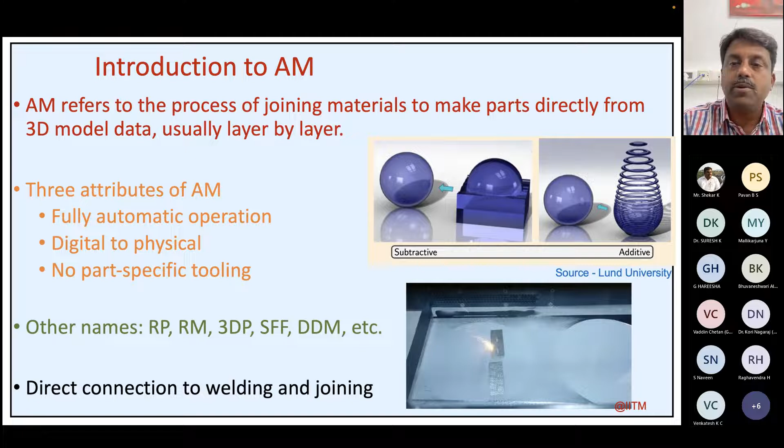So regarding the timeline, when does all this happen? If you look at additive manufacturing as such, it is not so new. The first patent of realizing a component in a welding-based process, where one person used a welding torch, a gas metal arc torch, and started depositing layer by layer to produce a final part, was actually filed in 1924 - even before our independence, before the Second World War. As welding scientists and professionals call it, this is a multi-pass weld, or weld overlay, and weld overlay was actually used to fabricate near-net-shape components for a long time.

But then the actual technique of producing the final component layer by layer, in a new era, was patented by a Japanese scientist named Hideo Kodama. Hideo Kodama first realized the fabrication of a component using photopolymers. These photopolymers are nothing but like the paint we apply for wall painting - when exposed to sunlight, the liquid paint cures and becomes solid.

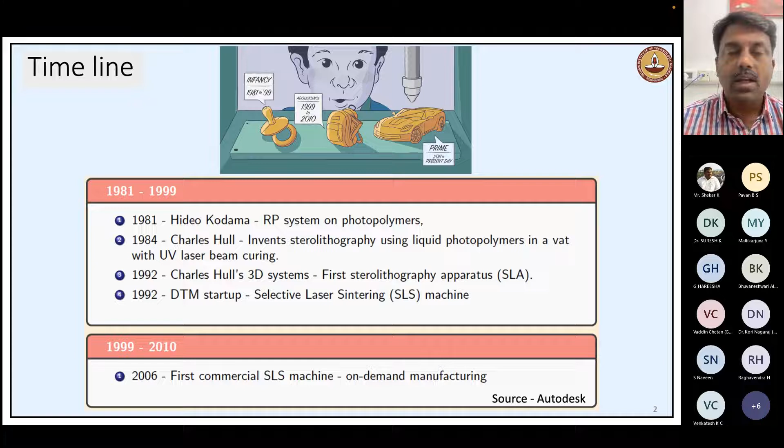So if you look at the history between the 90s and right now, simultaneously other techniques like laser wire or welding-based setups also came up to produce large volume components, which I will discuss in subsequent slides. So what is the state of the art now in additive manufacturing?

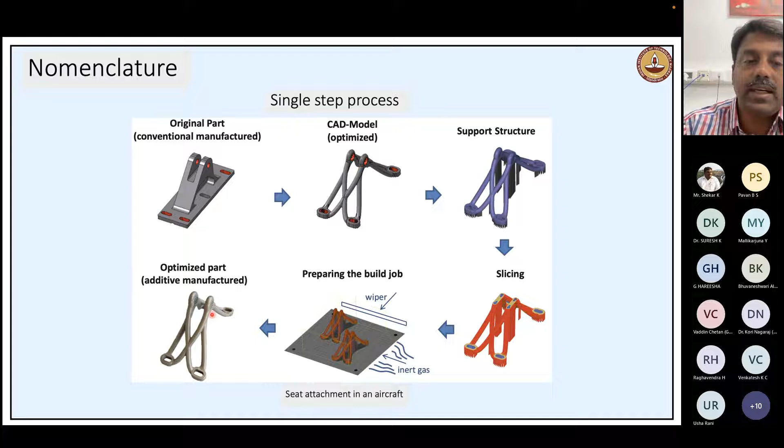For making such a part, you can't use a casting process - it becomes very brittle, and it's difficult to produce thin sections. So the only best way is to just print it. We redesign the part because of the design freedom we have in additive manufacturing, developing a complex design, converting it to CAD drawing, doing slicing and path planning, and printing it to realize the final part, which can be used straight away in the end use. This is a single step process.

Some processes require multiple steps in additive manufacturing. For example, if you want to produce a ceramic component - ceramics, when we actually want to print, you can't melt a ceramic particle.

For example, if you want to produce an aluminum oxide component, or silicon carbide, or tungsten carbide. So what we do is we start with CAD data, and then use a technique like binder jetting, where we mix the powder with binder selectively at the location where we want to create a solid object.

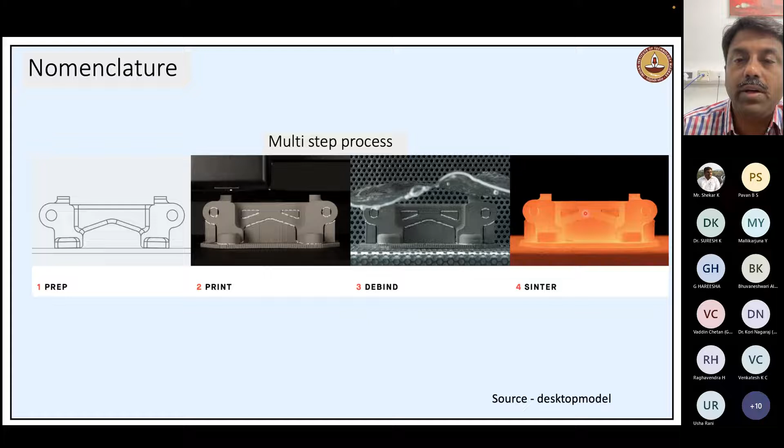Subsequently the powder mixed with binder is heated up to debind and then sinter the part so that we create a dense component. This requires multiple steps: printing, then post-processing to debind, then sinter the part. So in additive manufacturing, you can do single-step or multi-step component fabrication, based on the feedstock we use or the properties we want to achieve. So what are the benefits of additive manufacturing?

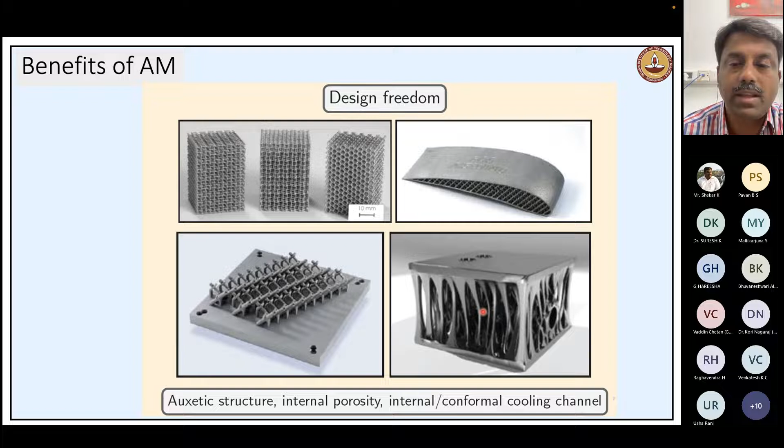If the tool is cooled and the temperature of the tool is maintained, we expect the tool life to increase significantly, and the performance of the component as well when it is exposed to high temperatures. There are other complex designs we can use for various engineering applications, including conformal cooling channels. All these things are possible only by additive manufacturing.

In conventional manufacturing, what you see is what you get. Whereas here, what you see is what you print. So you can visualize and make a CAD drawing, and then you can realize that part, in an extremely cost and time effective manner, and the process is fully automated because the entire process chain can be controlled, with unattended operations and no part-specific tooling.

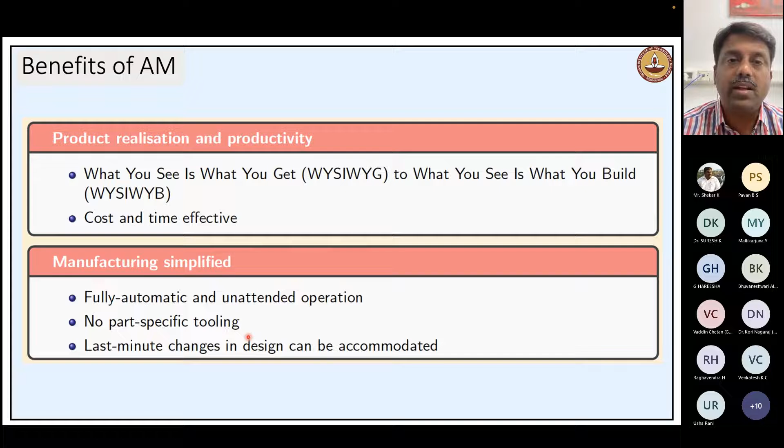If anyone wants to change the design last minute in conventional manufacturing, it is not possible. We'll have to go back and change the entire process chain, including the equipment, tools, and everything, to change even a small design. Whereas here, if some design change needs to be accommodated, we can quickly do that as well.

We can introduce effective design, as I talked about, and we can also introduce new materials. The material selection for any engineering or biomedical application is strongly dependent on the manufacturing method. For example, for casting aluminum alloys, we always prefer aluminum silicon alloy because it is castable. If you use any other aluminum alloy, it may crack during the casting process. So the selection of material is strongly dependent on the manufacturing method.

Some other alloys, for example aluminum 7000 alloys, can have excellent mechanical properties, but you cannot use them when producing by casting. So how do we make use of those alloys? We can use additive manufacturing. The alloys which show excellent performance at laboratory scale, the new alloys we develop, if they are not machinable and not castable, we cannot use them for engineering applications. But because of additive manufacturing, we can also use those alloys that show excellent performance.

For example, one of the implants I showed you, we are developing a new alloy based on cobalt-chrome composition. Cobalt is toxic, but cobalt-chrome implants we produce for dental and maxillofacial applications show excellent properties if the cobalt concentration is reduced to less than 30%, compared to about 60% in conventional cobalt-chrome. Reducing cobalt concentration is good because cobalt is toxic when used in implants, and cobalt ions released when the implant is in body fluid conditions are very toxic for the body.

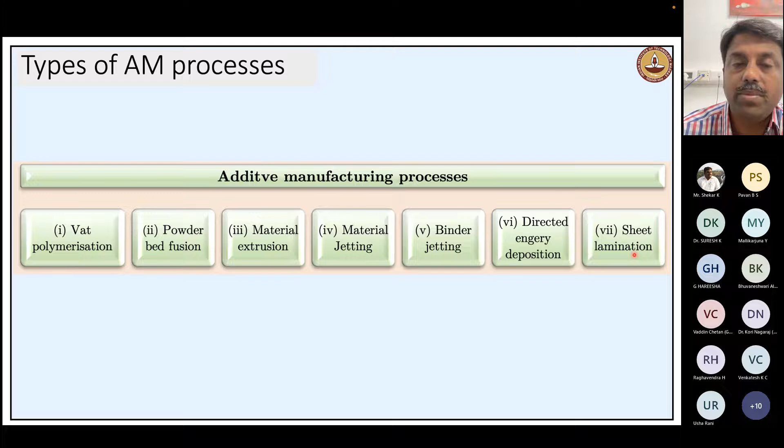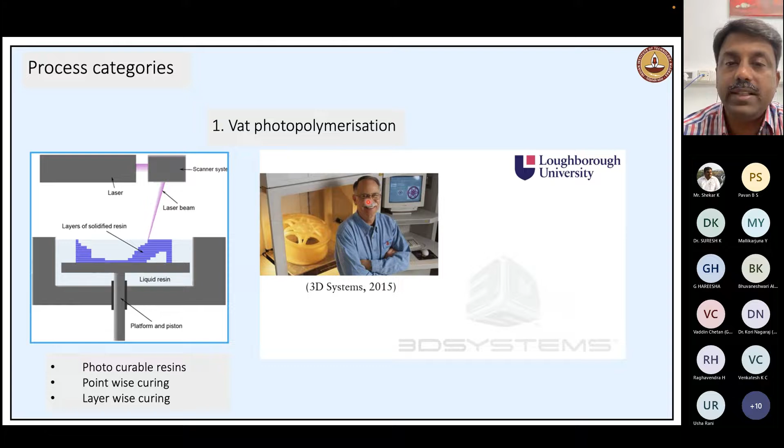So what is the first process? The stereolithography apparatus, the first process commercially developed by Charles Hull. In this case, we take a photopolymer. What is a photopolymer? This photopolymer cures when it receives light photons. So we take the photopolymer in a container, which a vat is, right?

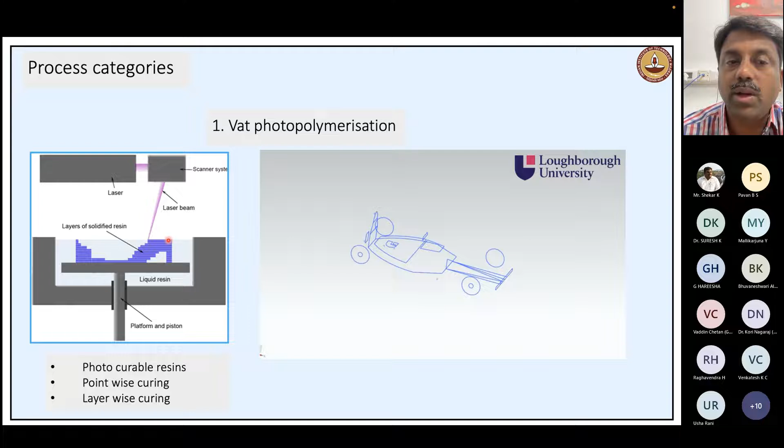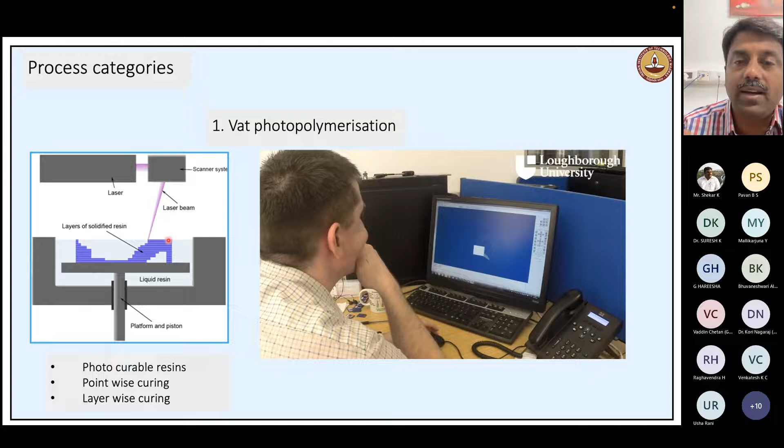And then we selectively expose only at the locations where we want to create a solid, by photopolymerization reaction. These photopolymers can be acrylics, epoxies, or vinyl ethers. You see advertisements for paint, right? Epoxy paints or acrylic paints and so on. We use those as feedstock, and then we use a light source, either laser or ultraviolet.

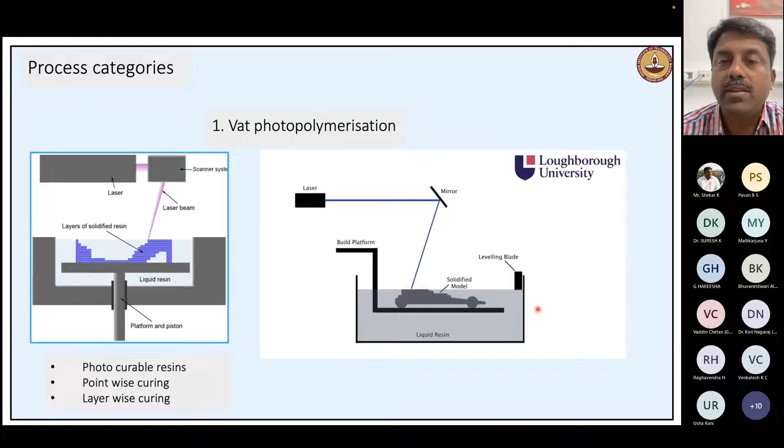What you see over here is a build platform, and the photopolymer liquid is filled, and in the liquid state it's a monomer. So when the light falls onto this, the monomer becomes polymer by cross-linking. So now the laser actually scans, and we selectively cure the photopolymer at the locations where the light falls.

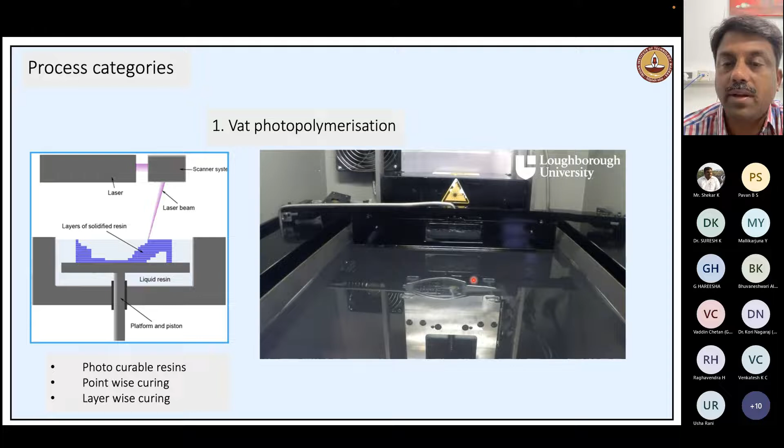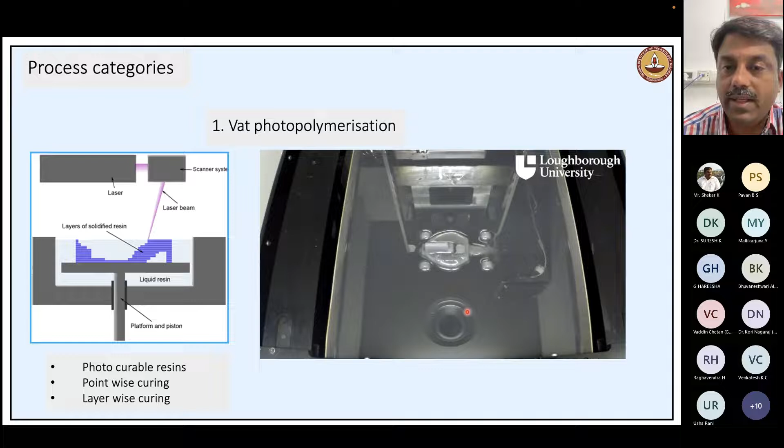So once one layer is done, we get the second layer by spreading new liquid photopolymer on top of it, and this process is repeated. Finally we get the object made. This technique is known as vat photopolymerization because the photopolymer is kept in a vat, and cured by selectively exposing it to light photons. That's why we call it stereolithography apparatus by the commercial term, but the actual academic term is vat photopolymerization.

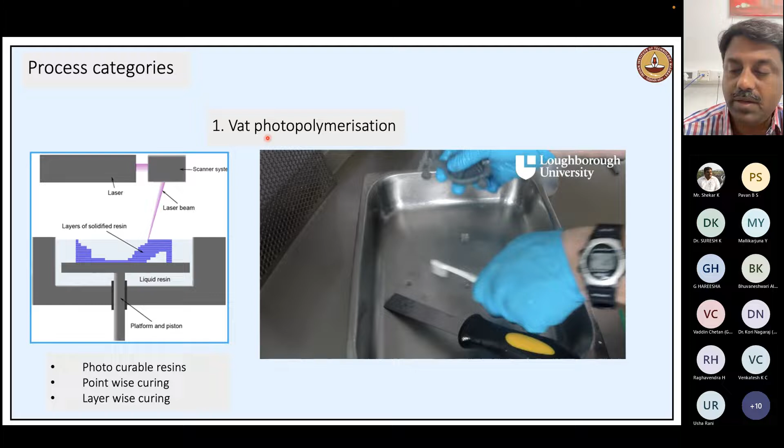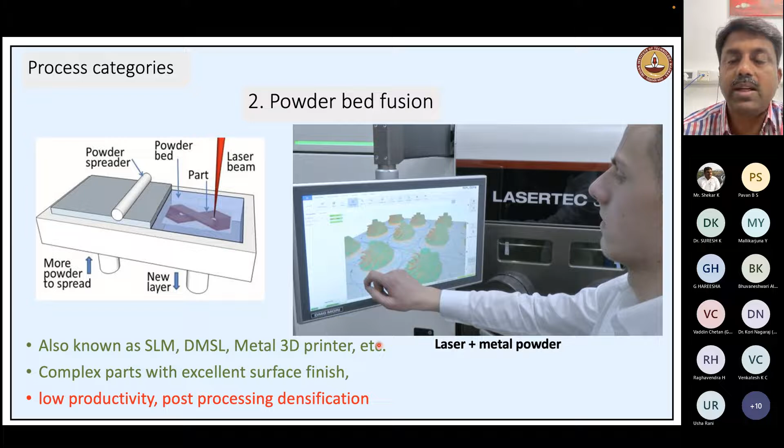The second technique is powder bed fusion, and you must be hearing this technique called metal 3D printer, or various names like SLM, DMLS—these are commercial trademark names, but the actual name is powder bed fusion. In this case, feedstock powder is kept on the substrate, and the laser or electron beam selectively melts the powder, only where the laser is exposed, melting it to create a molten pool, which solidifies based on the layer geometry we are creating.

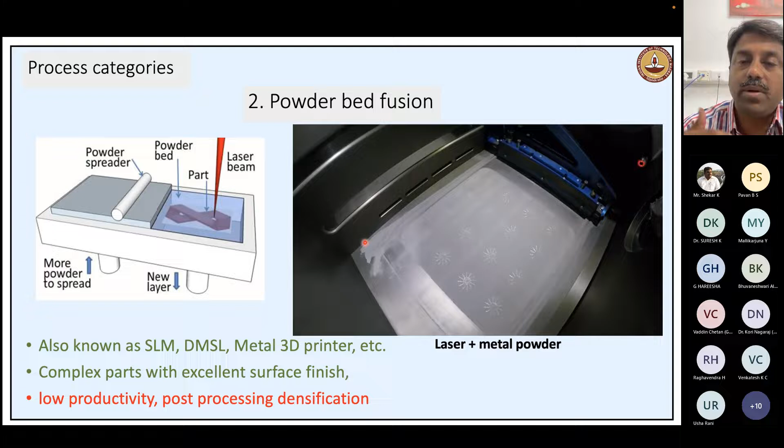So we first take the powder and spread it onto a substrate, and once the powder is spread, the laser falls onto it, and then subsequently melts the powder layer by layer. We create a weld made at a very fine and localized condition, about 40 to 80 microns per layer, welded with the previous layer. This process continues, and once we finish printing all the layers, we take the final object out and use it for various applications.

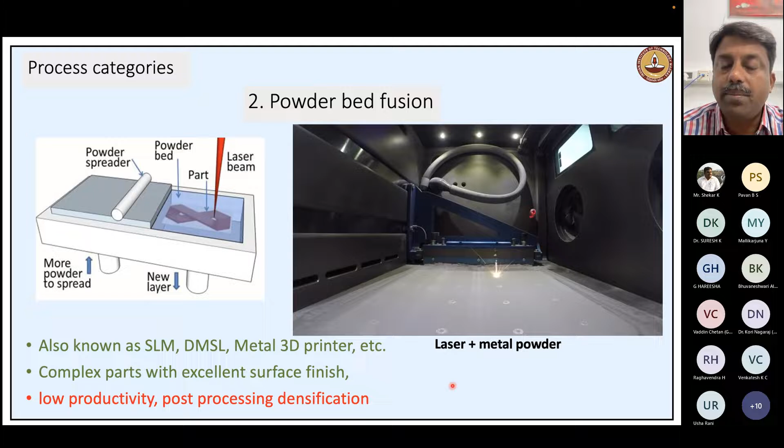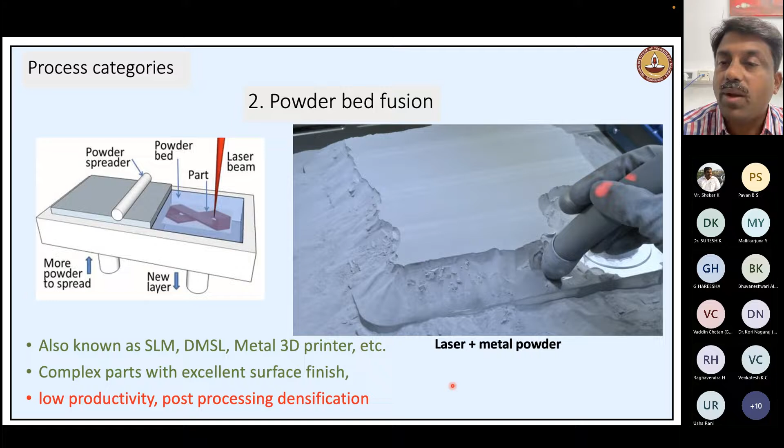So what is the advantage of this process? You get excellent surface finish compared to other metal additive manufacturing processes. Most cases, we use this for features less than a millimeter. For complex shape containing components in metals and alloys, we use this process. We can use a large amount of engineering alloys, as long as the thumb rule is satisfied: the alloy must be weldable.

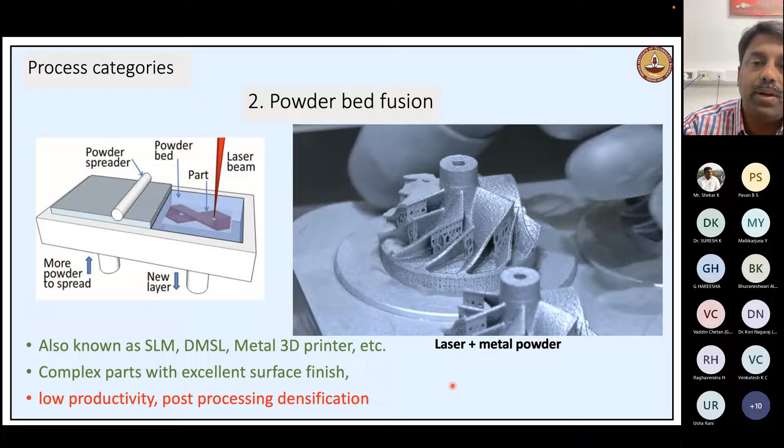A disadvantage of this process is low productivity, because we have to spread the powder and then the laser melts it, so compared to other processes it is slightly slow. And when the laser power is low and we only sinter rather than melt, we need post-processing, which makes it a multi-step process.

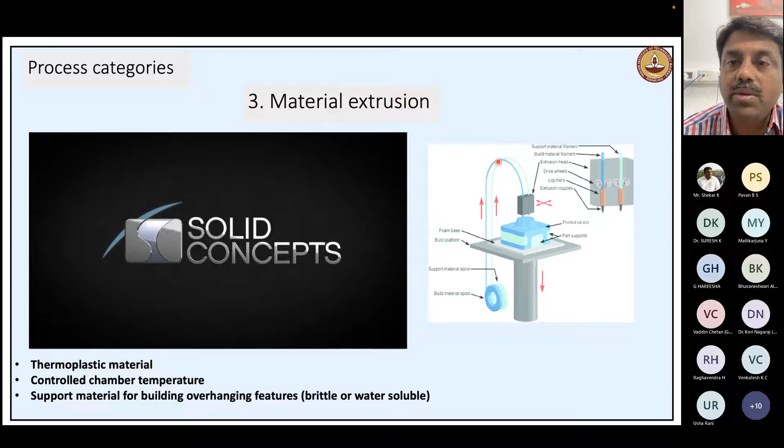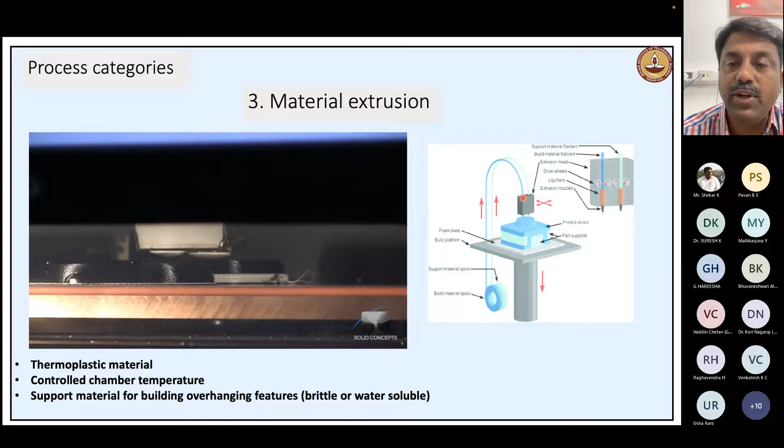Good. So the third additive manufacturing technique is known as material extrusion. In this process, we use a filament, and the filament feedstock is extruded through a heated nozzle. This nozzle at high temperature makes the filament fluidic. So when we take thermoplastics, for example a thermoplastic filament, it's heated up and becomes highly malleable. The heated thermoplastic is deposited through an extrusion nozzle, and the extruded malleable thermoplastic cures either naturally or through activated curing.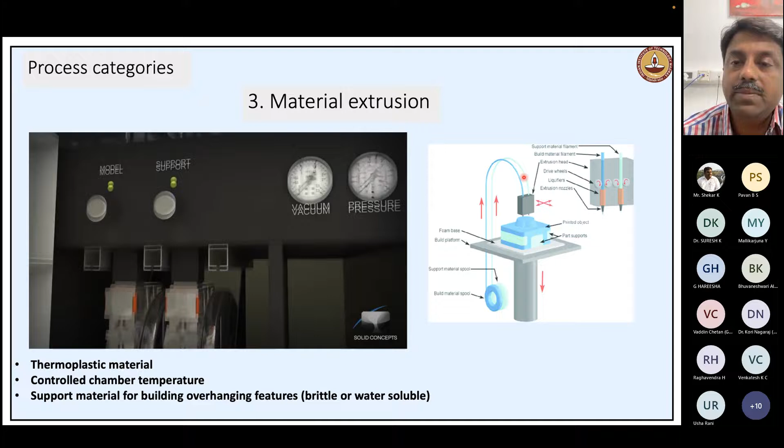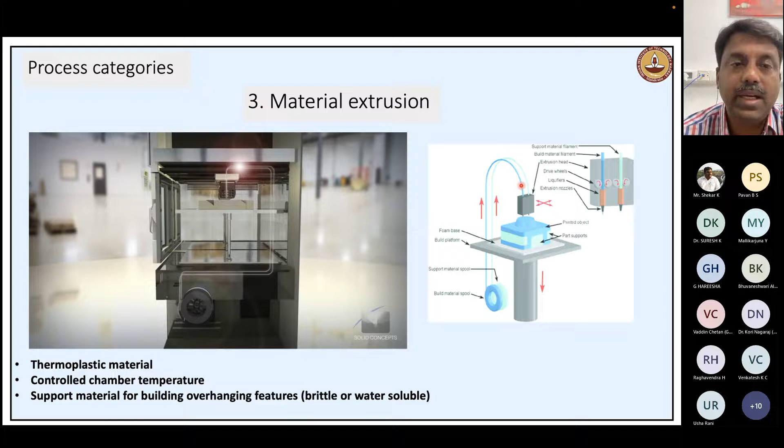And this process, because we are extruding the feedstock, is known as material extrusion. This process is very famous because it is cheap, and you can also build your own setup. Most of the 3D printing equipment you buy online is material extrusion based. We can also use multiple feedstocks—if you have multiple extrusion heads, one can be used for support material, and another for the feedstock material used to create the component.

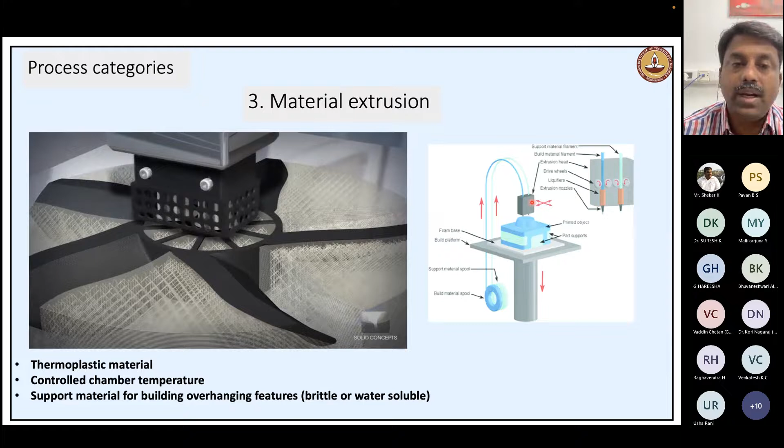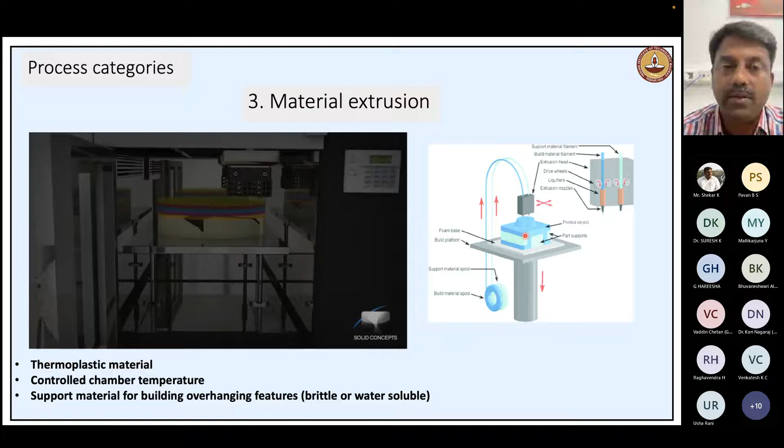The surface finish of this component is determined by the layer thickness and the bead geometry, bead dimensions, which we create, and that can be controlled. We can also use different feedstock, so we can produce, for example, color components by using dyes mixed with the feedstock, and then we can remove the substrate, because the substrate either can be water dissolvable, or you can just remove it to get the final component.

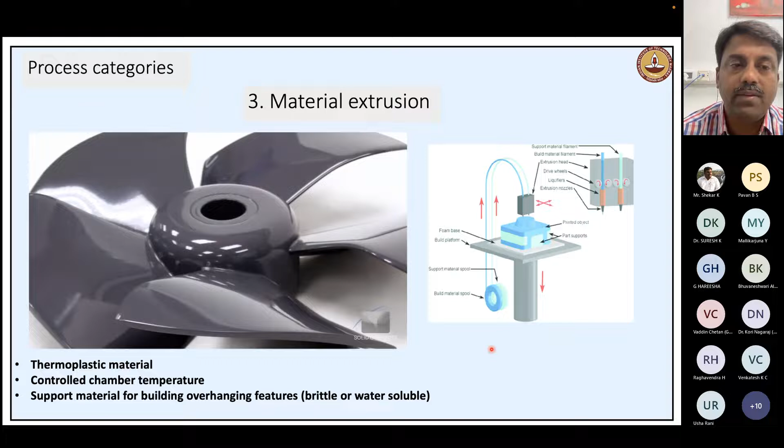Commercially this process is known by various names. For example, FDM, fused deposition modeling, which is actually nothing but material extrusion. FDM is a trademark of a company.

So the fourth process is material jetting. In material jetting, as compared to material extrusion, we use a liquid feedstock, and this process is synonymous to an inkjet printer, what we have for printing.

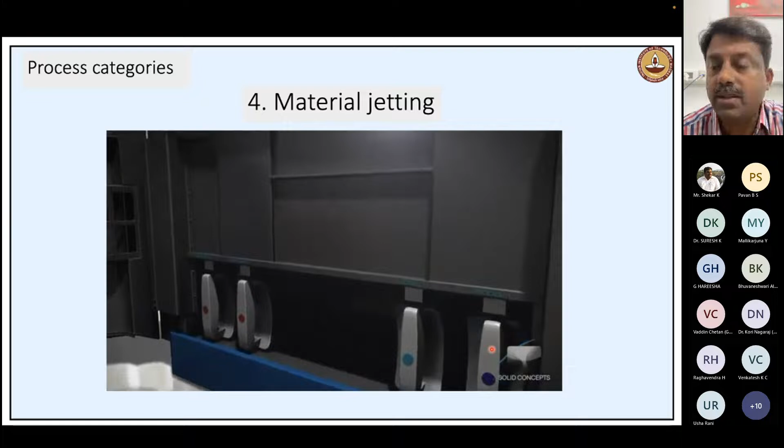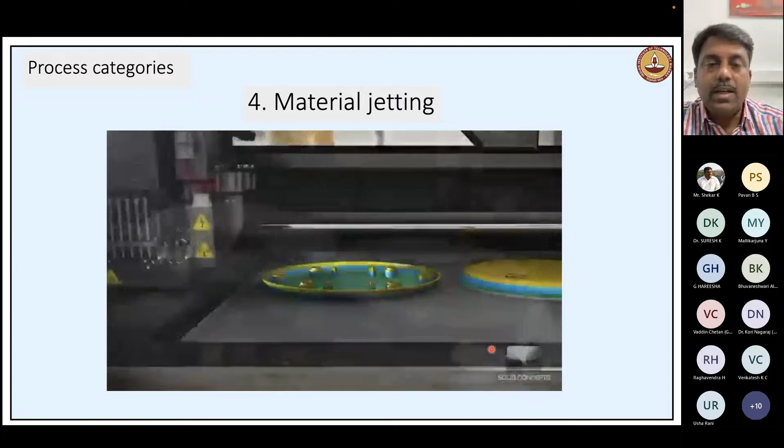For documents, you take ink, and the ink is dispersed using a jet nozzle on a paper at the selected locations where we want to create the color, the black, or you can also use RGB cartridges. Similarly here, we take a liquid feedstock, and this liquid feedstock is selectively deposited on a substrate. The liquid feedstock can cure either naturally, at room temperature and ambient conditions, or we can also photopolymerize it. We can let an ultraviolet ray, or some small heating element, move on top of the deposited liquid onto the substrate, and then the liquid cures, and you get the final object.

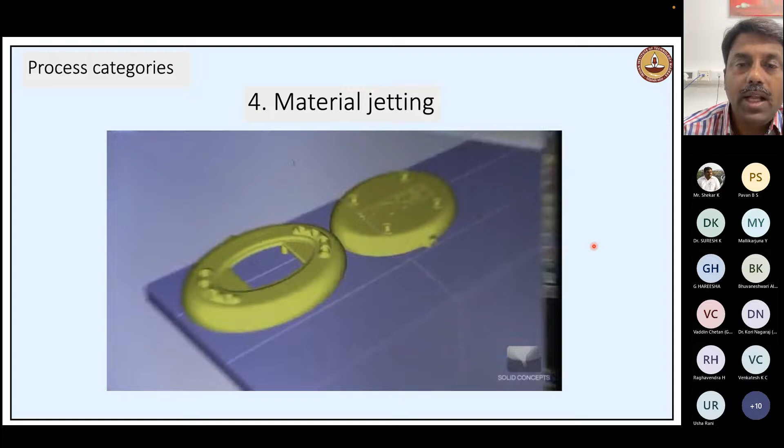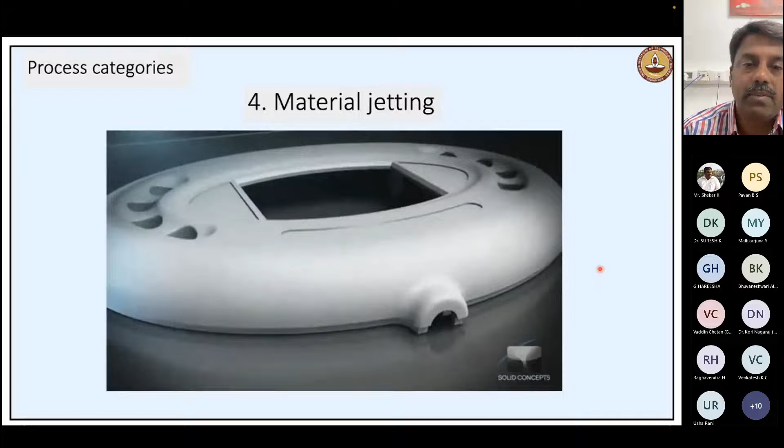The best use for this technique is to create wax molds for investment casting, or we can also produce multicolor components, because the feedstock is a liquid. We can add coloring agents to create objects containing multiple colors. So material jetting, we use it even for our research purposes, to generate multicolor components.

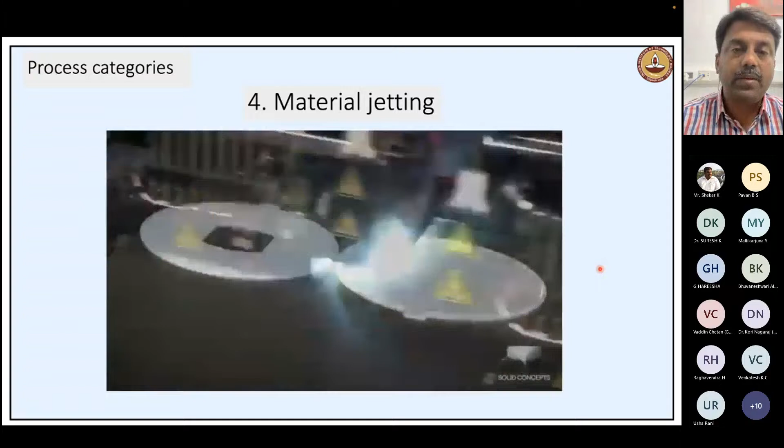We can have multiple composition and gradation, and we can also change the polymer chemistry or even material chemistry. People also use material jetting for metals as well. For example, printed circuit boards, PCBs. People use material jetting to print the entire PCB at one go, including the electronic components and the connections, the backbone, using this technique.

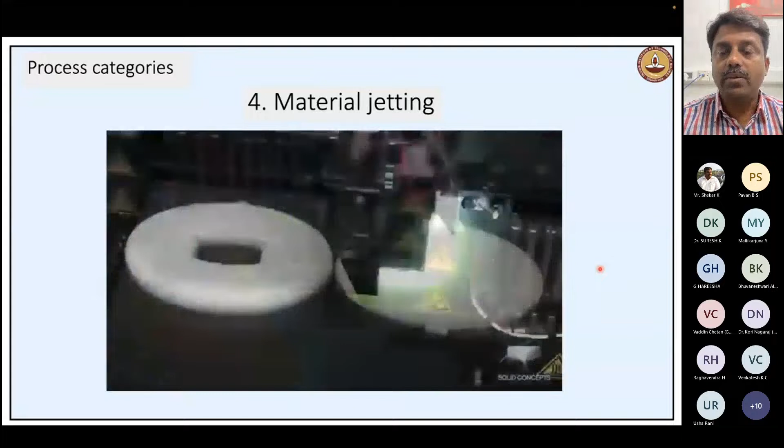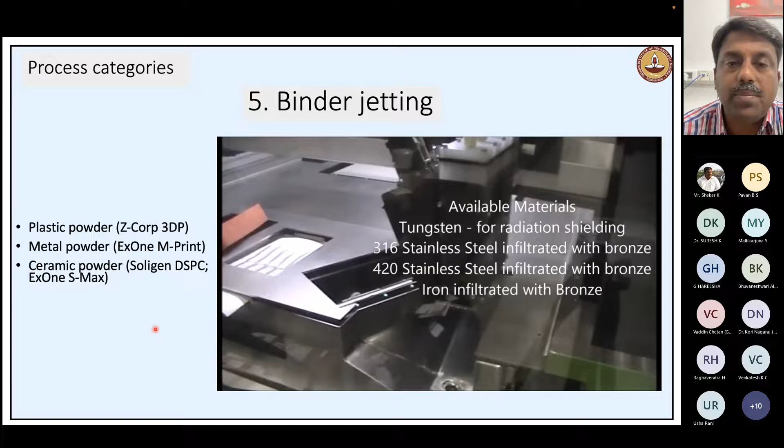The fifth technique available is binder jetting. In binder jetting, it is similar to powder bed, but here the powder is not molten or sintered by a heat source. So we selectively eject the binding agent onto a location where we want to create a consolidation. Binders are added only at the locations where we want to create a consolidation.

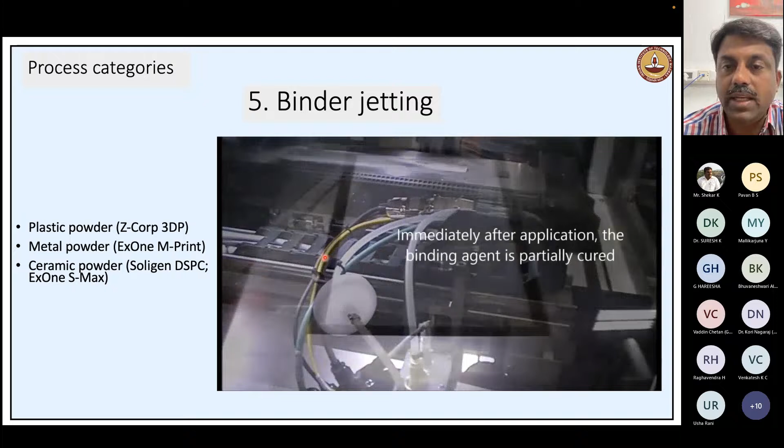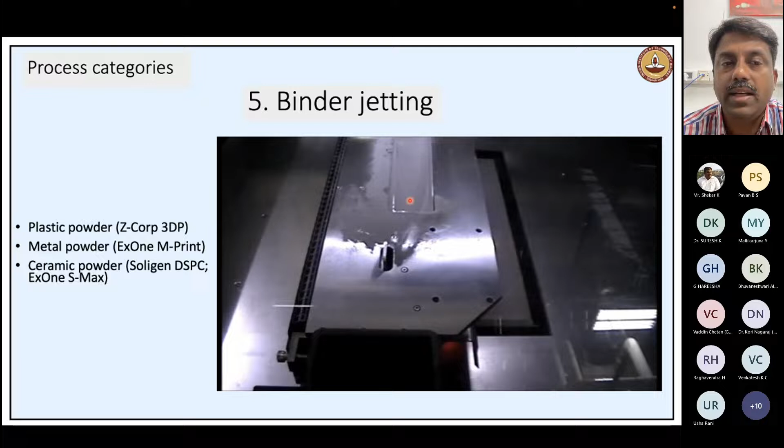So now the binder is added, and then subsequently we can let a small heater heat up the locations where the binder is added, and the binder reacts with the powder, and the powder gets consolidated to create a solid object. Here we are not melting the powder, but a binder is added, creating an agglomeration at the locations where binder is present.

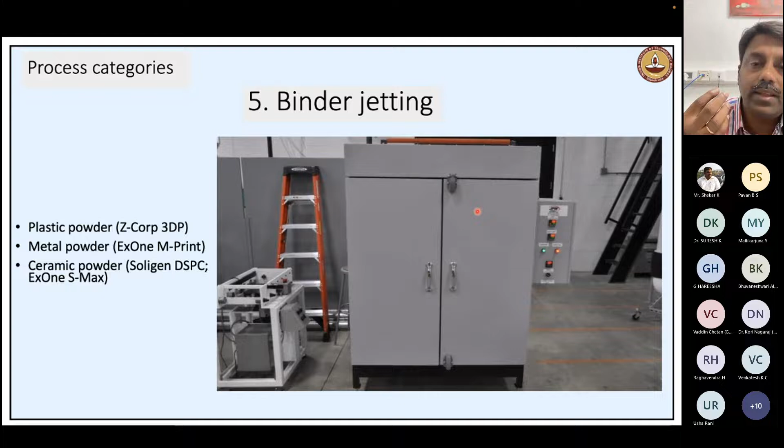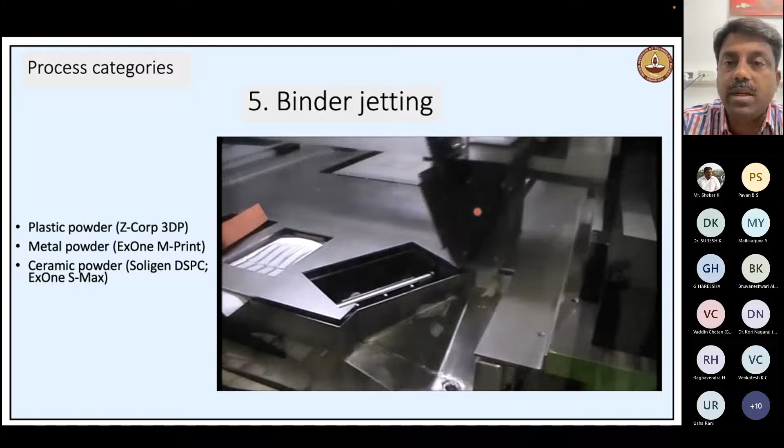Then subsequently the next layer of powder is added, and what we create is actually called the green part. Subsequently we can take the green part out, place it in an oven, and further sinter it to get a final component. So we can also create ceramic components here, hard materials, because we are not melting anything. For the tungsten carbide cobalt ceramic tool, we can effectively produce it by creating a feedstock mixture of tungsten carbide and cobalt, then add binders, and subsequently do a post-process sintering, to get a nice ceramic tool.

The sixth process in additive manufacturing is sheet lamination. Sheet lamination is not quite like another process, because here we use both layer-by-layer manufacturing and machining in combination. The feedstock is a thin foil, and this thin foil is welded with the substrate and previously produced layers by solid state welding, for example ultrasonic consolidation.

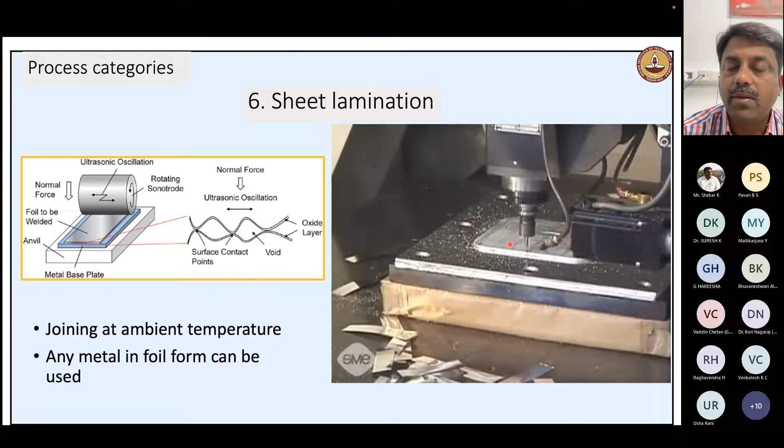Ultrasonic consolidation joins the foils with the previous layer, and then a machining head removes the unwanted regions in a layer. So the foil, the feedstock, is welded, and then the regions which are not required, which are not part of the design, are removed by either machining or milling, whatever way we want to create that.

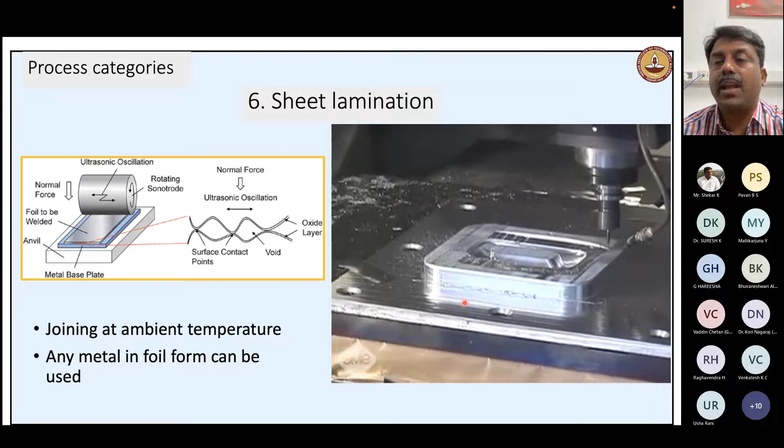This is a neat technique to produce components, which can also be smart. For example, the actual joining process takes place at ambient temperatures when you use ultrasonic welding. So we can also introduce some sensors in between the layers.

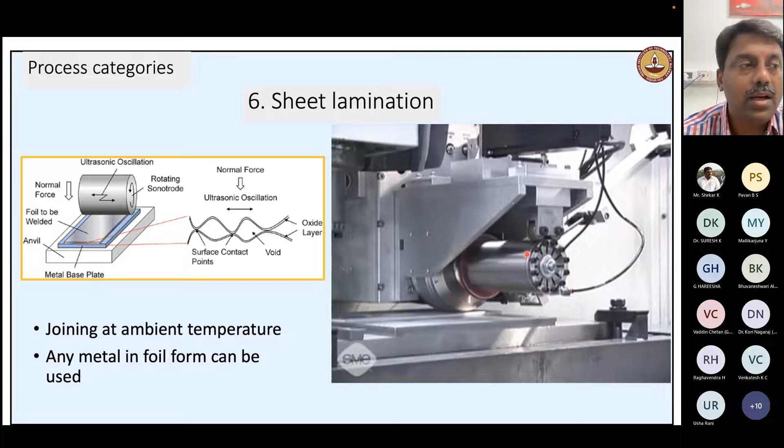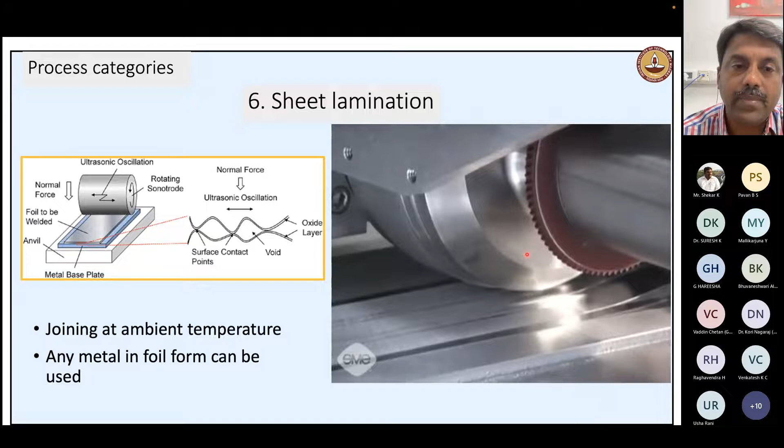Say for example RFID tag or a load sensor, or subsequently when we want to analyze the performance of the component, like in the braking situation, for example brake shoe, we can produce sensors inside which can also predict the braking sequences. So people use this technique, sheet lamination, to produce smart components layer by layer.

The seventh technique is known as directed energy deposition, or DED, which is similar to welding or laser cladding. In this process, a feedstock is fed, which can be either powder or wire. In this case, a laser source and powder are used. The powder is fed onto the laser, and due to the laser interaction, the powder melts and is deposited on top of a previously solidified layer. We keep adding layers to produce the final part. This is called directed energy deposition because the feedstock is directed to the energy source, where it melts fully and the molten droplet is transferred.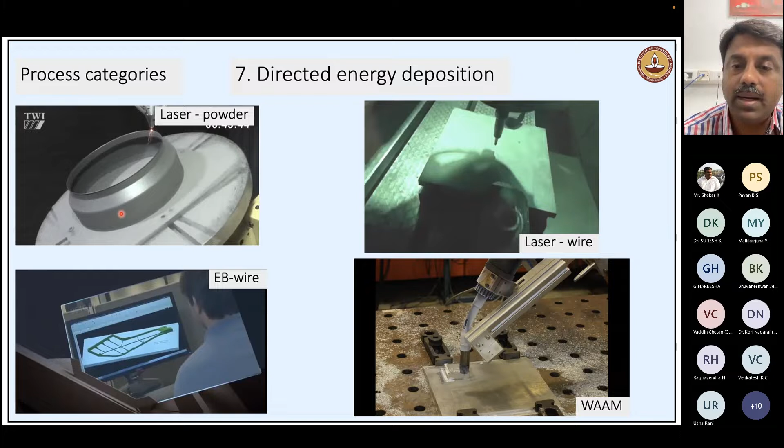So the feedstock can either be powder or wire. The heat source is primarily laser, electron beam, or arc plasma. Here it is a laser with powder.

Here we use a laser and wire. The wire is fed coaxially onto the same axis as the laser. The wire melts, and subsequently the molten droplet is created and deposited. So it's laser welding with wire feeding.

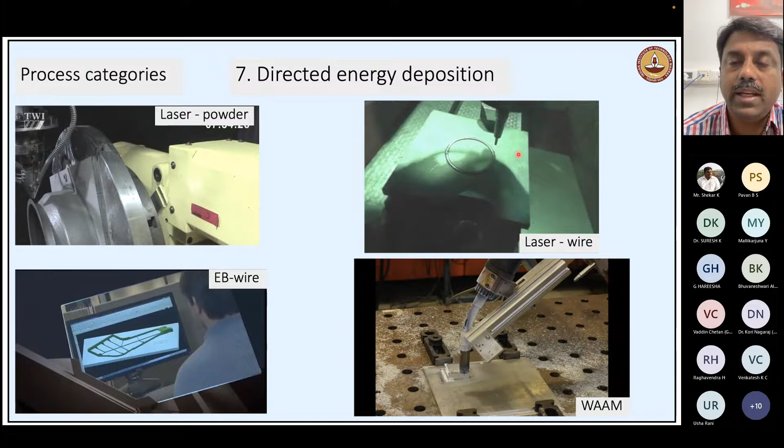Layer by layer we create the part, and we can also use electron beam with wire, where the electron beam heat source is used to melt. We feed the wire onto the electron beam path, and the wire is molten and then deposited. The advantage of electron beam is that the entire activity is done in a vacuum chamber, so very sensitive materials can also be printed using this process, and it is highly energy efficient compared to laser.

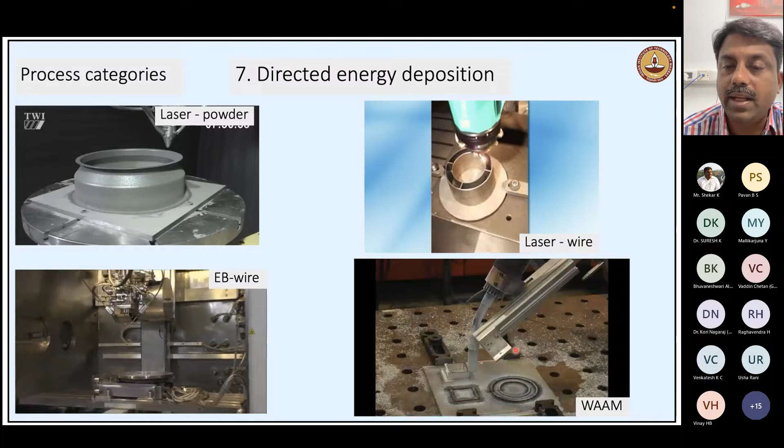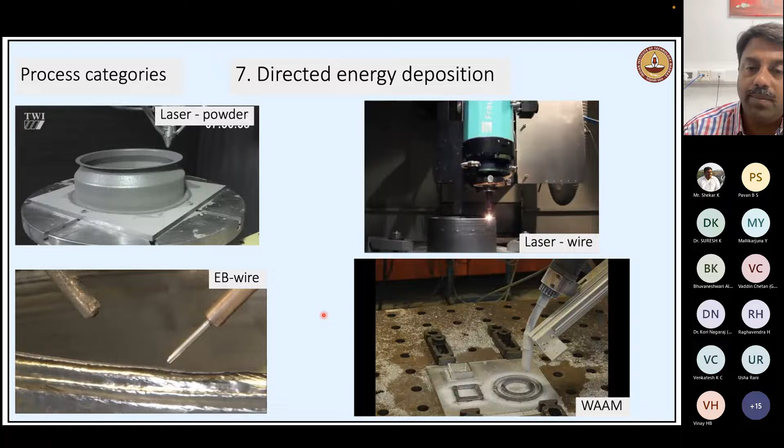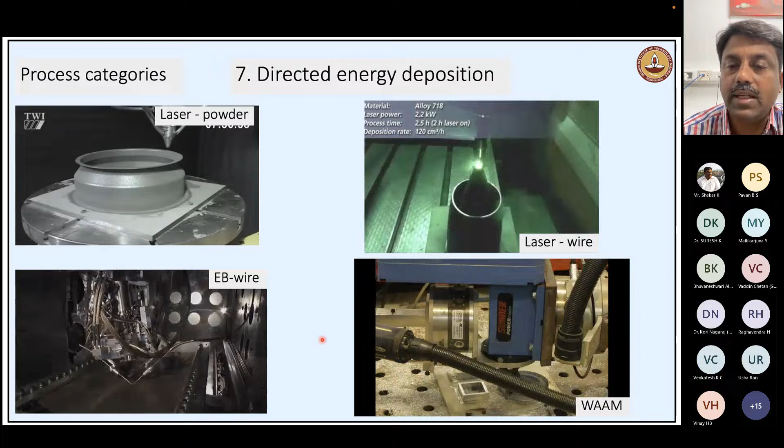We can also use a simple welding setup, a gas metal arc welding torch, to deposit layer by layer, and subsequently use a machining tool to finish the already deposited layer. This technique is also called wire arc additive manufacturing, but the actual term is a DED process using arc plasma, so it's an arc wire DED process. What you see here is one of the setups which combines both deposition and machining together.

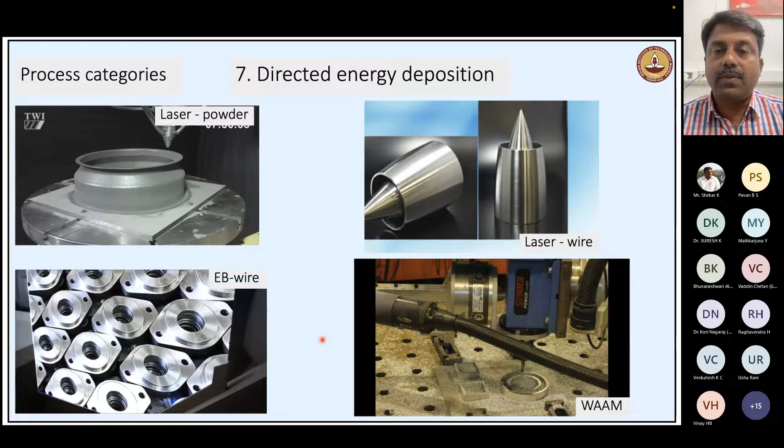If you look at the entire additive manufacturing spectrum, all the processes can be classified into these 7 categories. There are other processes too, for example friction deposition, which is also one of the DED techniques, or cold spray. All of them can be classified under the DED process.

If you look at the generic process chain for all 7 processes, we start with the CAD design, which is a 3-dimensional data set with X, Y, Z information. First we convert the CAD drawing into a more suitable format for additive manufacturing, the STL format. The STL format describes the contour of the object by sets of triangles. Any shape can be defined by filling it with triangles.

These triangles define the outer contour, and subsequently we slice this STL file based on the layer orientation. If you want to print the object along a certain direction, we slice it based on the layer thickness, and each slice is then created individually by layer. So we slice it, and for each slice we create a path using a path planning strategy. These layers can be created using a DED process, which needs a robotic arm and a controlled power source to deposit, and subsequently once the deposit is made, we can machine it to create the final component.

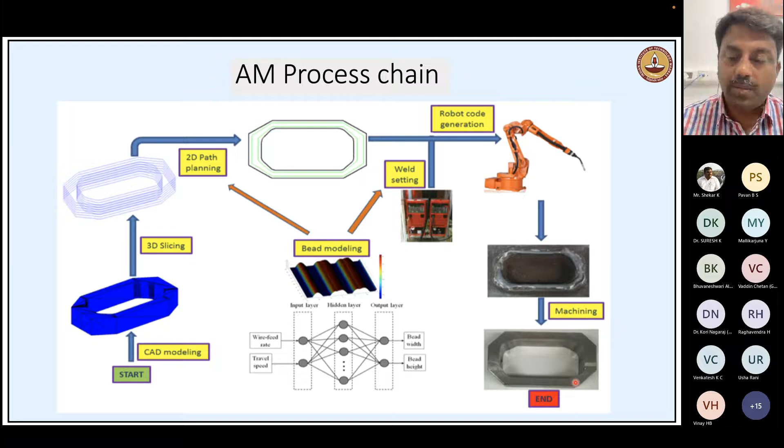So the first step, as I said, is to convert the CAD into an STL file format. Why do we need this? Because you don't need the 3-dimensional data format directly, so in STL file we convert from CAD data. If you look at the STL file, the contour of the object can be described by these triangles, which are best described by their vertices and the surface normal.

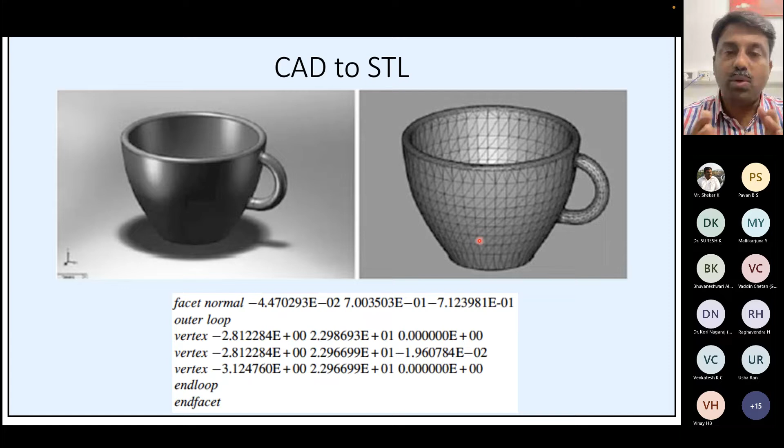Once you identify the coordinates of these triangles, we can construct the object using this file. The STL file is important because it enables us to slice. Imagine building this object vertically, layer by layer. When we slice at a layer, we identify the intersection points of the cutting plane with respect to the vertex positions, connecting the cutting points with respect to triangles. We define the outer boundary, the boundaries of the object.

Once we have converted into an STL file, the second step is to use it for slicing. We have a triangularized STL format, and slicing can be done in various ways. For example, to get a complex nonlinear geometry, we can also change the slice thickness, layer thickness, based on the geometry. If you use a uniform slicing layer thickness to produce such a non-linear object, we end up producing something like a staircase, and the surface roughness will be very poor.

Instead of using a uniform layer thickness, we can also use layer thickness changing as a function of build orientation, build direction. This is actually very beneficial to get good dimensional accuracy and improve the surface finish. This is what we call adaptive slicing.

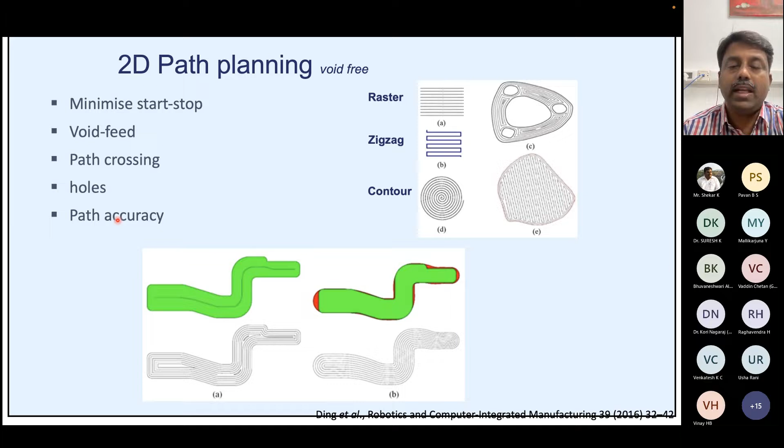These are some examples, for instance for a fuselage on an aircraft, showing how contour path planning can be used. This is a CAD drawing, and this is a single layer. We identify the medial axis, and then start depositing, beginning from the medial axis, finally producing the final component.

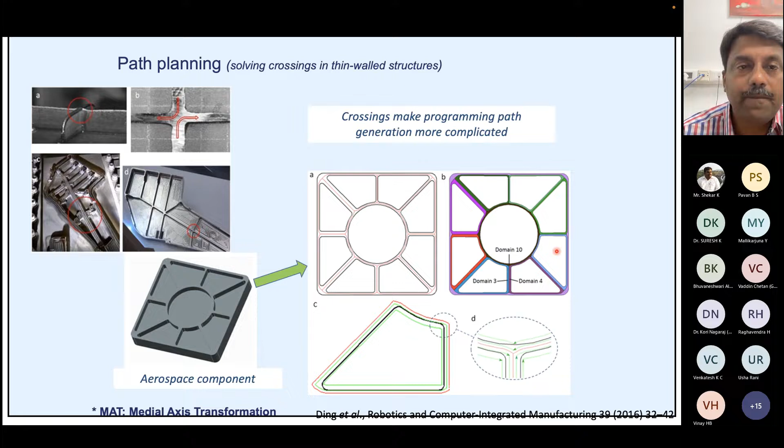Good. And these are some example components which we printed using the DED process at our collaborator's place, using a technique I explained earlier.

We can also manipulate these slicing and path planning strategies to our advantage, because path planning strategy is important to change the cooling rates and temperature gradients prevailing in the solidifying molten pool. By carefully manipulating these, we can also control the microstructures and therefore the properties of the component.

Okay, so having said all this, we're almost approaching an hour. There are challenges in additive manufacturing. The biggest challenge is defect formation, because if you use metals and alloys in DED or laser powder bed fusion, it is essentially a multi-pass weld. So whatever defects you may expect during welding, you may also see here, like porosity and lack of fusion. All these things need to be controlled.

The other challenge is anisotropy. The microstructure we generate is always directionally dependent, so properties vary as a function of direction. We have shown that by carefully understanding the physics of the process and controlling the process parameters, we can avoid defect formation and anisotropy.

The second challenge is speed and productivity. Additive manufacturing as such cannot match conventional manufacturing in terms of productivity.

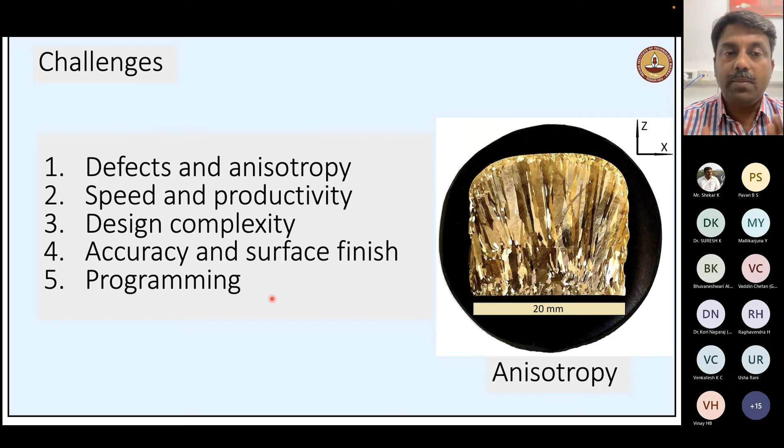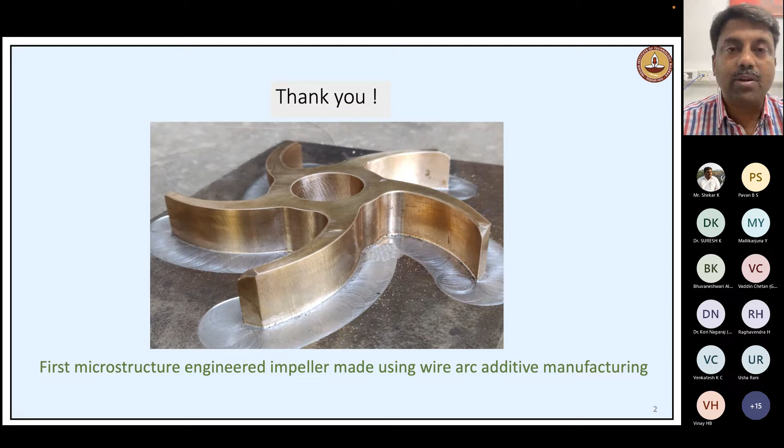Good, so with this I'll wind up, since it's exactly about an hour. Thank you for your kind attention. If you have any questions, I'll take them up, or else you can visit my homepage or YouTube page and so on - you'll find a lot of interesting stuff there. Thank you for your attention.

Thank you, sir, for your wonderful session.